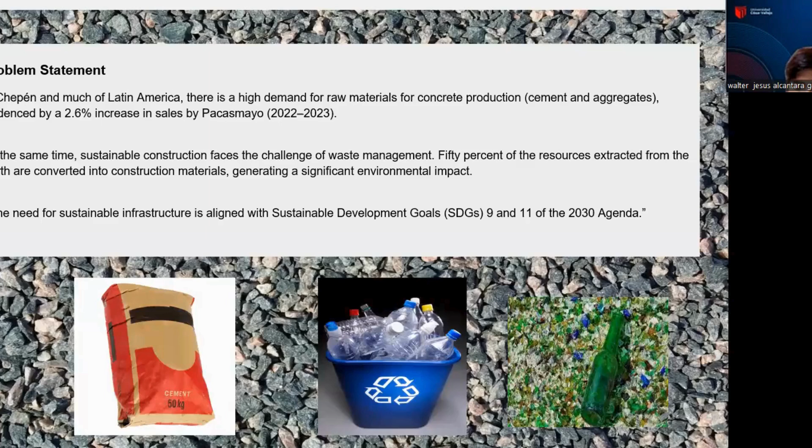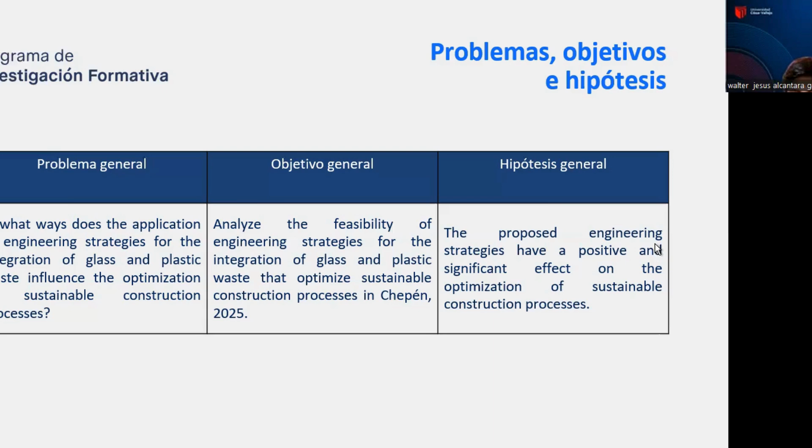Zambrano (2020) developed an innovative technique incorporating plastic waste and sugarcane bagasse fiber, improving structural ductility and thermoelectric insulation.

Lopez and Guerrero (2020) promoted EcoBloss, an ecological approach to social housing, aligning with SDG 9 and 11, the Sustainable Development Goals.

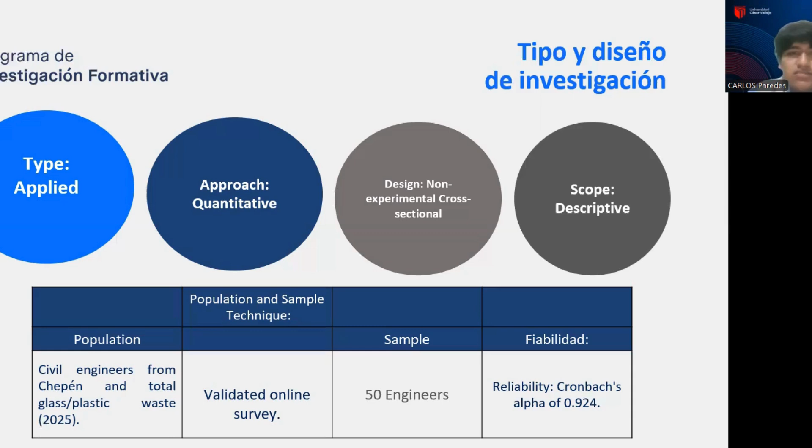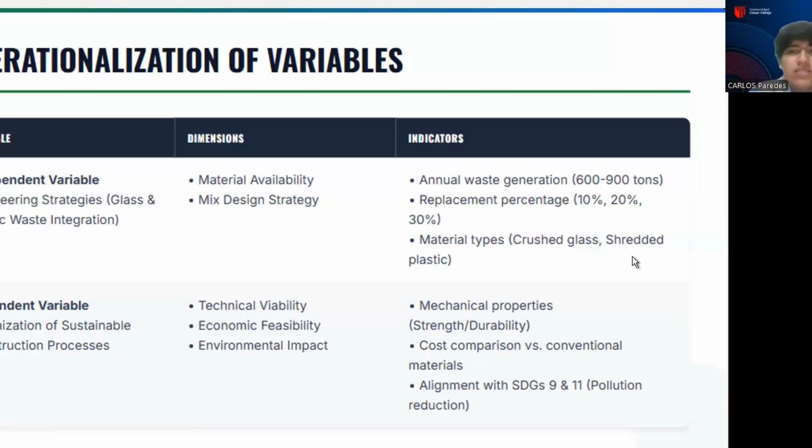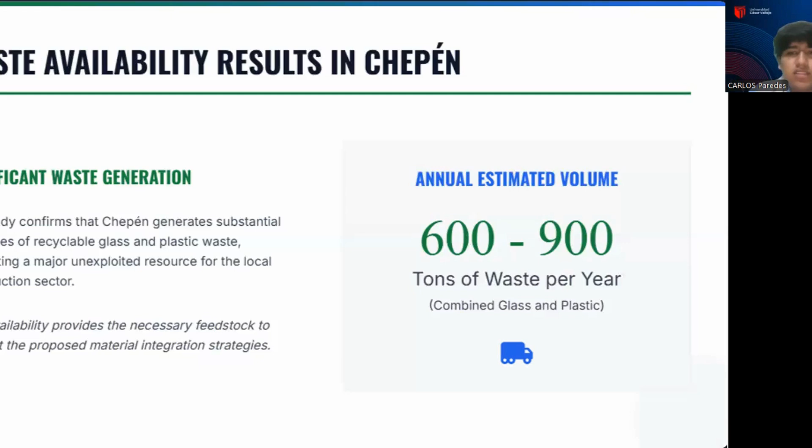Continuing with the feasibility results in Chepen: significant waste generation. The study confirms that Chepén generates substantial quantities of recyclable waste, including plastic waste, representing a major unexploited resource for the local construction sector. This availability provides the necessary feedstock to support the proposed material integration strategies, with annual estimated volumes of 600 to 900 tons for future glass and plastic waste combination.

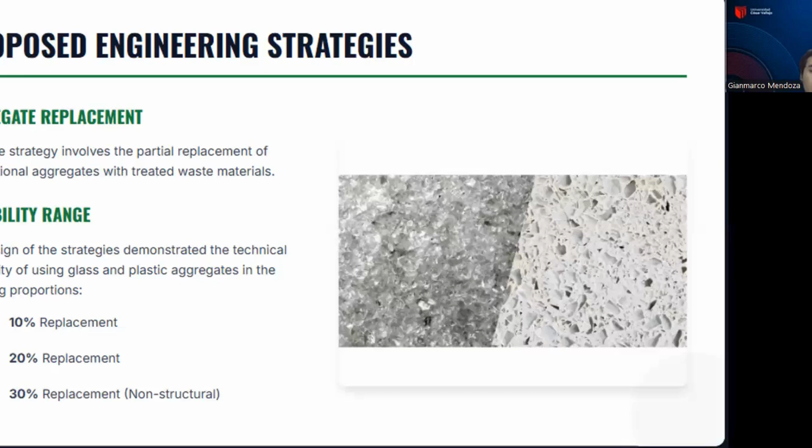Feasibility range: the design of the strategies demonstrated the technical possibility of using glass and plastic aggregates in the following proportions: 10% replacement, 20% replacement, and 30% replacement for non-structural elements.

Continuing: Technical viability. The inclusion of 10 to 30% recycled aggregates does not compromise the structural integrity or strength of the concrete, validating its use in construction applications.

Economic viability: using locally available waste materials significantly reduces raw material acquisition costs, making the strategy cheaper than sourcing conventional aggregates.

Environmental viability directly contributes to SDG 9 and 11 by diverting non-biodegradable waste from landfills and reducing the carbon footprint of material extraction.

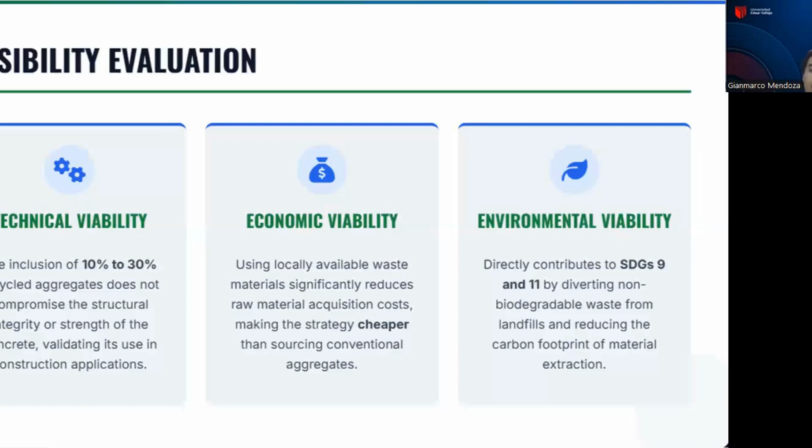Continuing: Discussion of results. The results are consistent with Mansour et al. (2023), who state that an aggregate of 10 to 20% glass improves durability, provided the finishing treatment is correct. In contrast to Mabori et al., it is validated that using plastic at 10 to 20% yields favorable mechanical and environmental results. However, our study suggests a threshold of up to 30% for non-structural elements.

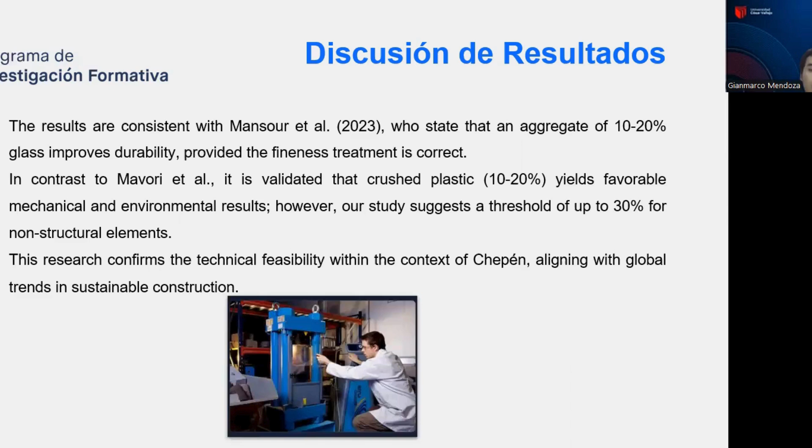This research confirms the technical viability within the context of Chepén, aligning with global trends in sustainable construction. Continuing to conclusions.

Conclusions: analyzing strategies related to the use of glass and plastic in construction, we found that their use reduces the amount of discarded plastic and glass. It was determined that Chepén generates significant quantities of glass and plastic, with approximate amounts between 600 and 900 tons per year.

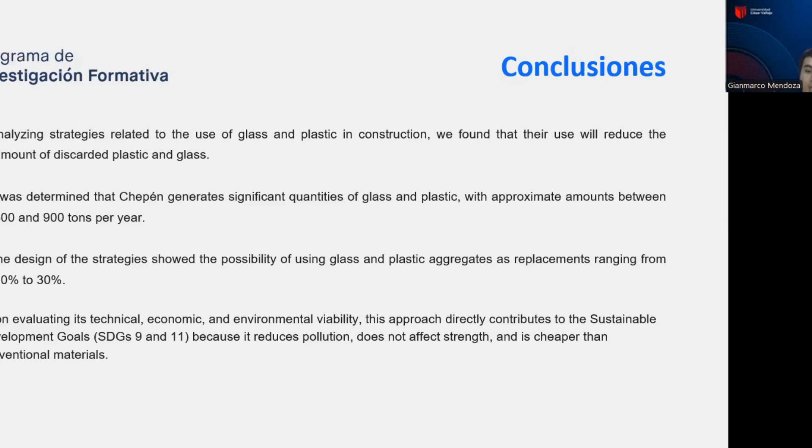The design of the strategies shows the possibility of using glass and plastic aggregates as replacement ranging from 10 to 30%, upon evaluating its technical, economic, and environmental viability. This approach directly contributes to the Sustainable Development Goals SDG 9 and 11, because it reduces pollution, does not affect strength, and is cheaper than conventional materials. Thanks.